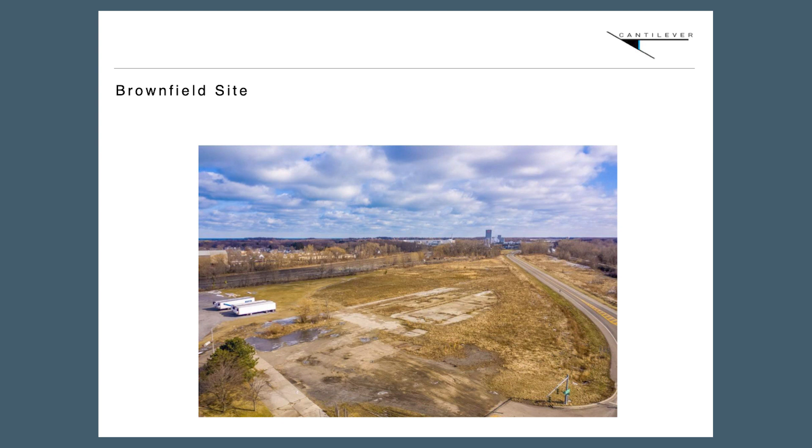So this is a brownfield site. Could be anywhere in the world. I want you to imagine it to be anywhere in the world. Could be Russia, could be - I actually think it's from Oklahoma, I don't know why. So we're going to build some buildings on this bit of land. Here we are, brownfield site, anywhere in the world. Could be Sydney, could be Newcastle, could be Russia, could be China, could be anywhere. We're going to build some buildings, right?

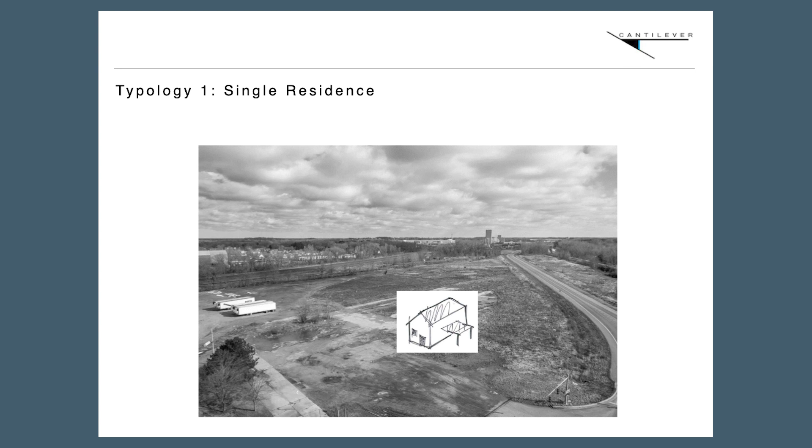So the first building we're going to build is - can I get there? Sorry, what do I need to do? Right, okay. And we're going to build what I call architectural typology number 1, which is a single residence house. So here we are, anywhere in the world, I'm going to build a single residence house. How are we going to build it? Anyone have any ideas? What's the structure going to be? Anyone have any ideas? More than 90% of the buildings in all of the world's single residence houses are built exactly this way. Come on, tell me.

Slab on ground with frames, timber framed, correct. You go anywhere in the world, including 90% of the housing stock in Australia, is built with timber stick framing, right? Developed about 200 years ago in the US when they started to standardize the sizing of timbers, 2x4s. I grew up with my dad when I was 3 years old building timber frame buildings. We still do it today, bizarrely, and it's been going on for 200 years, right? So I'm saying this is architectural typology number 1, which is a single residence house, has a structural solution which is common throughout all of the world, which is timber framing. And together, they're linked - I call them a pair. They're a structural and architectural pairing.

I'm going to have three of these. So that's architectural typology number 1, with a structural pairing of timber stick framing. I get a bundle of timber delivered to the site, and I'm going to stick by stick by stick put them together.

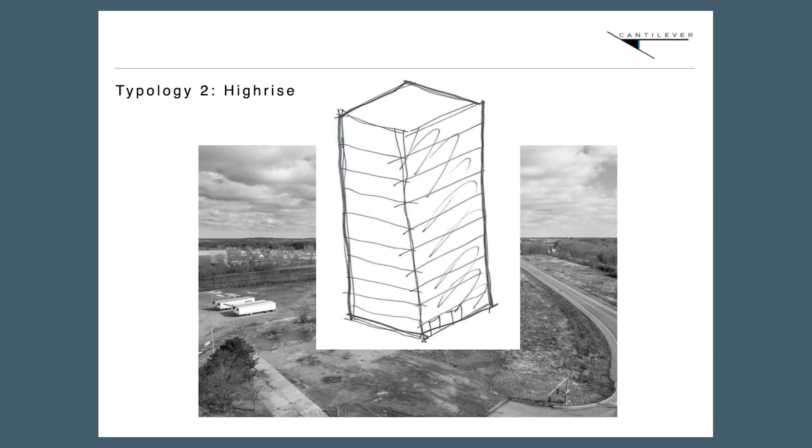Typology number 2, high-rise building. Think anywhere in the world - it's probably not 90%, but Australia's like this, America's a little bit different. What is the structural engineering solution for this building? Reinforced concrete. I don't know what the percentage is, probably not as high as 90. But reinforced concrete. So here we are, architectural typology number 2, high-rise building, structural engineering solution, which is a concrete frame building. No brainer.

Can anyone else give me another architectural typology that has a structural pairing where anywhere in the world, 95% of the buildings are going to be built that way? Super high-rise steel frame, ultra steel frame. So if we go back to the high-rise, there's some parts of the world, including the US, where high-rise buildings are done in steel frame. As a matter of fact, there's one in Sydney that was done in steel frame by Mirvac, but basically they're all concrete. Traditionally, these are concrete buildings.

So I had the luxury of working - not a luxury at all - of working on the Burj Khalifa when I was at Hyder, highest building in the world. It's a concrete frame. It has a different kind of concrete core, but it's basically a concrete frame building.

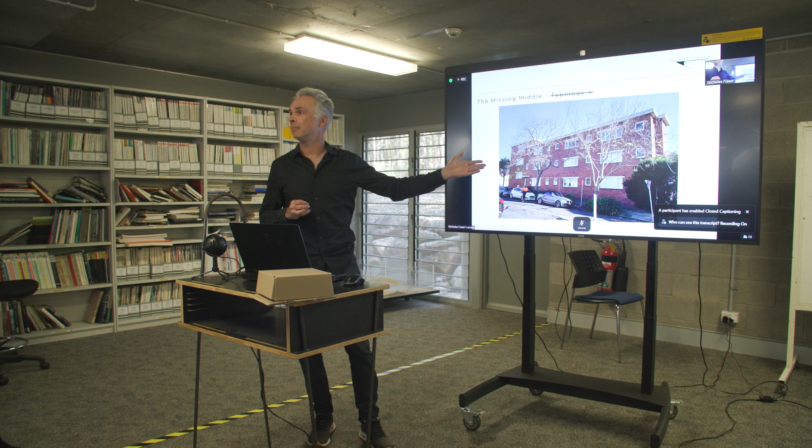They presented this to us, right? Budget $1.8 million, it was $2.8 million. It ain't going to get built. I said to Hamish, it would have been a good idea to get us in early, because we would have told you not to do this. That was done in the 90s and 2000s, but we don't do that anymore. Nobody builds like that unless you have oodles of money, and I don't even know if you'd have enough to build this. You're better off doing lots of different things, but that's not how we build today. It's just too expensive.

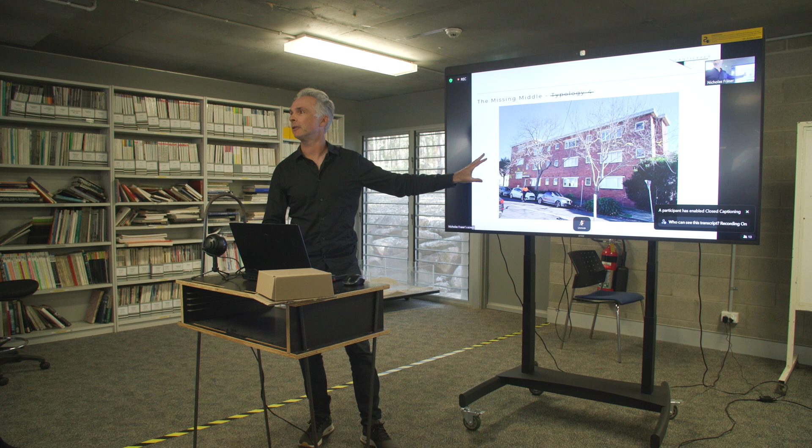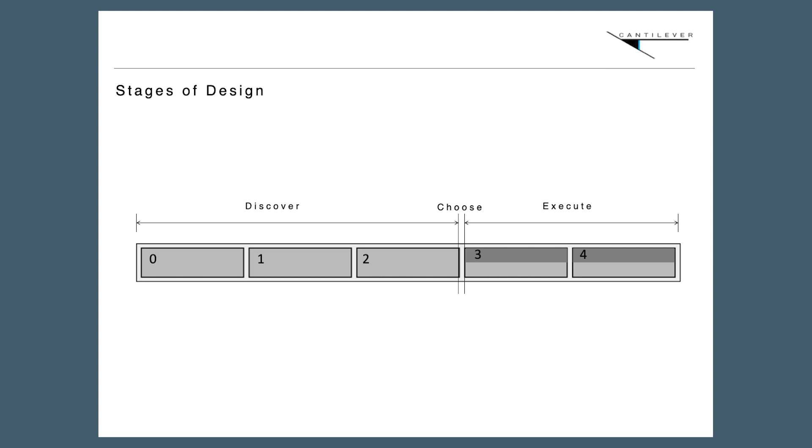So you probably know this, right? As an architect, this is probably what you do: you do a discovery stage, you choose what you're going to do, so this is the brief from the client. And then you discover what you're going to do from an architectural point of view. You choose, and then you execute. Execute means do the documentation. So there's a discovery stage where you have to discover what you want to do from an architectural point of view.

This is common to you, but it is not common to structural engineers. And I'm going to show you why.

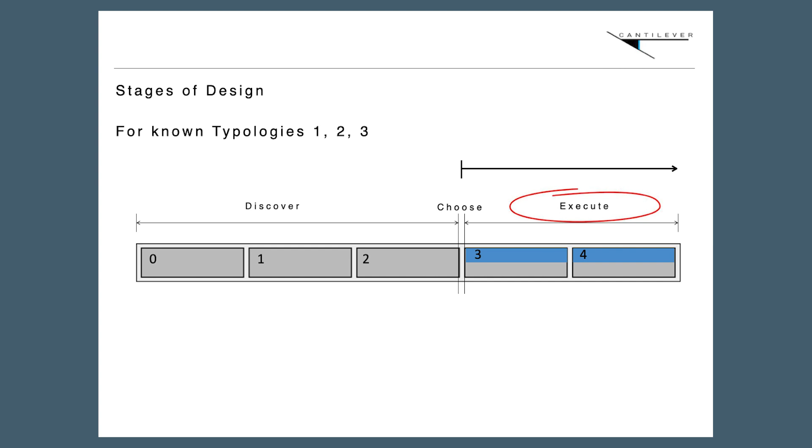For these known typologies, 1, 2, and 3, the structural engineer doesn't have to do any discovery. You, as the architect, can actually choose the structure. In a high-rise building, you can dictate what it's going to be - concrete columns, concrete slabs, a concrete core. So from a structural engineering point of view, for these typologies, there's no discovery. We just execute. In other words, you just give us where the columns are, and we'll document it and do the engineering.

But for structural engineers, outside of this typology, we need to do discovery. And that's the key to the ecosystem.

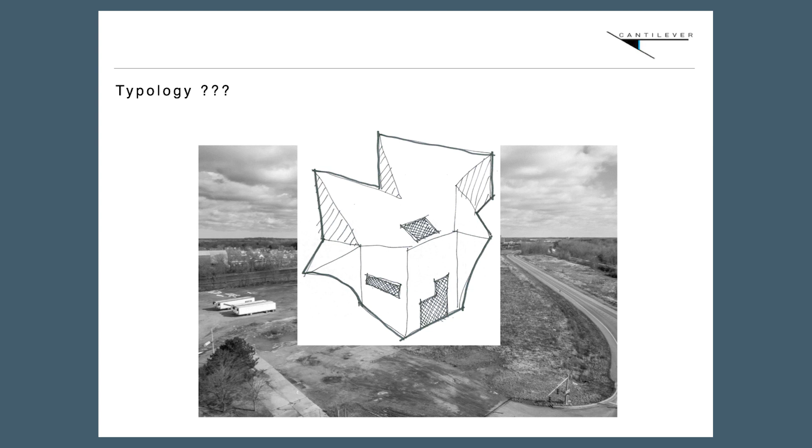So my question is, if we're given something that doesn't fit a typology - I'm not winning any awards here for graphics, this is me scribbling something together - if we're given something unusual that doesn't have a pairing, how do we build it? What is the structure? And that's where we need to do the discovery.

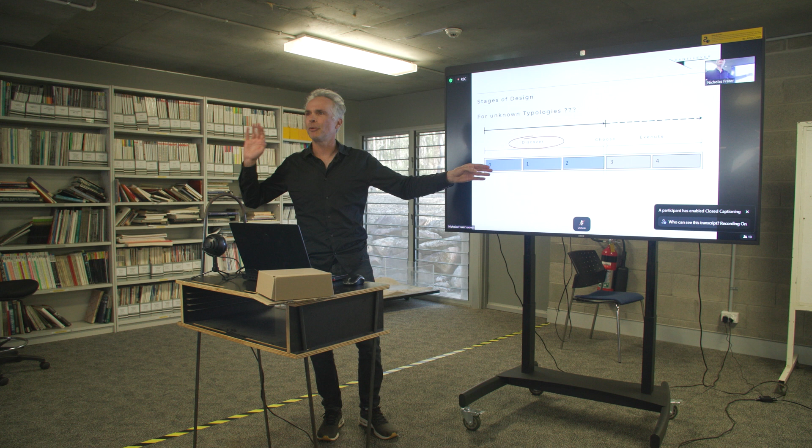As structural engineers, we are not trained to do this. As a matter of fact, lots of structural engineers would say, excuse me architect, just give me your construction drawings and we'll do the building. We just want to execute, we don't want to do this discovery. But at Cantilever, in my career, my work, we don't do jobs where you just need execution. We do jobs where you need discovery. And that's where we can add value, and that's where I say we need an ecosystem.

But remember, steel frame buildings, timber buildings - I'm saying all of these pairings, the single residence house paired with timber framing, the high-rise building with concrete, the warehouse that's steel framed - I think all of them will disappear. Even though we've been doing it for 100 years, I think all of those pairings will break down in the next 10 years because there's lots of things at work here. And those aren't often the best ways to build what is a building. So watch out for these pairings breaking down.

And in fact us as structural engineers - no, not us as a group - we need to get together in an ecosystem to do this discovery together. That's key. That is key.

We do a lot of timber, and you can't do execution if you do a timber frame building, because you have to do the discovery, otherwise you just do a concrete frame building. You can't take a concrete frame building and just change it into a timber building. Timber has its own unique properties that you need to account for. So you should start at the beginning with the idea: do I want to do a timber frame building, or does the architecture I have suit a timber frame building?

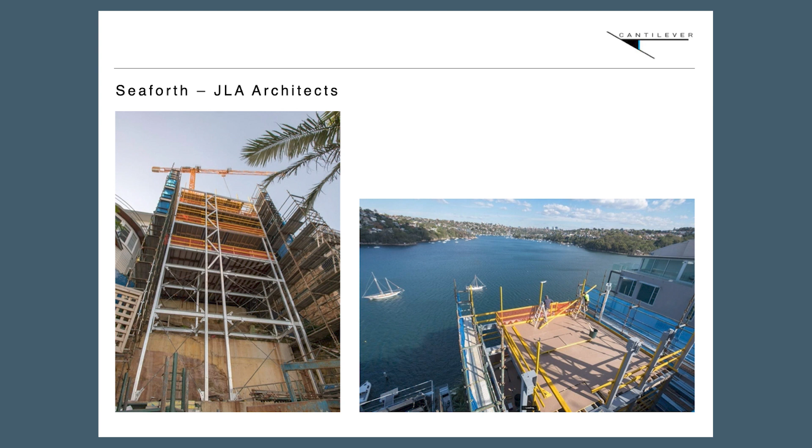This isn't winning any architectural awards, but it's a great story, and that is, it's a house in Seaforth. It's an 8-story building, and you drive in off Seaforth Crescent on the roof, and you go down 8 stories. So we're down at the water here, and you're driving in off the street at the roof.

Michael the client moved into the building about 6 months ago now, and I rang Michael and said, Michael, how are you? Are you happy with our decision to do steel framing? What would you do differently? And he said, Damian, if I built this building out of concrete, I'd probably be about 2 years from moving in, and I'd probably only be on level 3.

This building went up in 2 weeks and finished within another month, and then Michael moved in. And he said, by the way Damian, I want to tell you a secret. And I said, whoa, what's that? He goes, you were the 8th engineer that I rang.

And I said, the 8th? What are you talking about? He goes, no, I talked to 7 engineers before I talked to you. And I said, well, why'd you do that? And he goes, well, I just wanted to see what people thought. And he said, all the other 7 engineers recommended that this building be concrete.

You were the only one who, so when I first rang you, I said how are we going to build this building? Or do you want to get involved in this project? How would we build this building? And I said, oh, I don't know yet. And he goes, what do you mean you don't know? Why wouldn't we do this out of concrete? And I said, well, we might, that's definitely an option, but there's other options as well.

Through the course of about 2 weeks, eventually he gave me a bit of information that triggered this should not be concrete. And that is, he said, I'm going to be an owner-builder. And I said, well, you definitely don't want this as concrete, because as an owner-builder doing concrete, every single bit of formwork that you build is the set-out for the building. You want somebody to do all the hard work, which is the set-out, as prefab. So then we started exploring all the prefab options, and that's where we landed on steel.

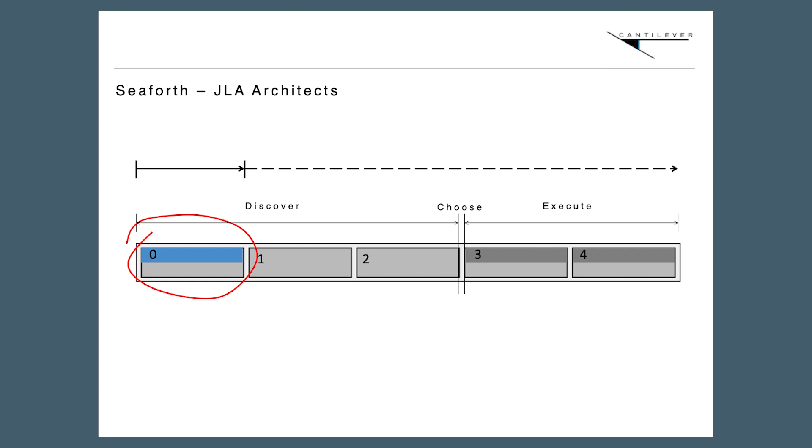So it was through that idea of discovery that we found out this building didn't want to be concrete. And what I think the other engineers were doing, I don't know what was in their heads, but I think they just wanted to execute. They didn't want to go through a discovery process. They wanted, like, this is an 8-story building, it's going to be concrete. That's the typology pairing that I know, and that's what I'm going to do.

And I don't want to have to think about this discovery. I don't know how to do it. I just want to execute, so we're just going to do concrete. And I think that's where we need to think about what the narrative is behind the client and the brief behind the client to determine what the structure wants to be.

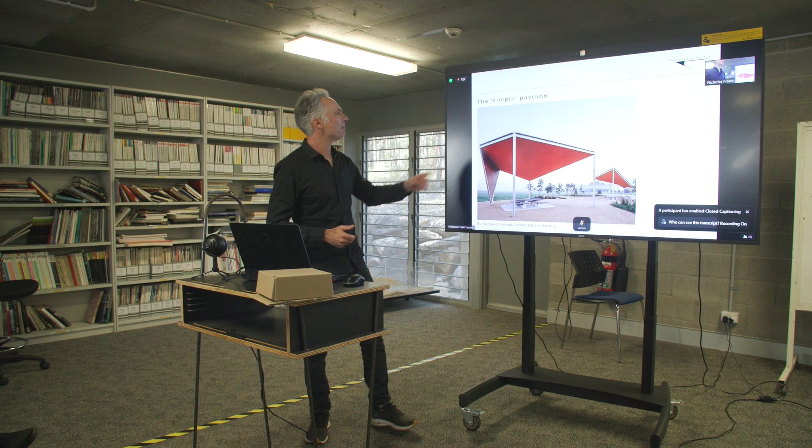I'm going to introduce the word simple here. I get calls from architects all the time saying, Damian, I have this really simple building. And that always rings alarm bells to me, because this was introduced to me as a simple building. Now, I hadn't formulated these typologies at the time, these pairings, when I got this drawing, but now I look back and say, well, the reason this isn't simple is because it doesn't have a pairing.

There's no obvious solution to this. Can it be timber? Can it be steel? Can it be concrete? Can it be glass, aluminium? Like, what is it? And I say the simplest buildings, including the Burj Khalifa, are ones that have a pairing. If you come to me and say, I have a kilometer-high building, I say, that's simple, because I have a pairing. So in my mind, it is a simple building.

Look at it. It's beautifully elegant. But do you know how long it took us to get here? The discovery process was at least a year on what it needed to be. It is amazingly complicated. Think about the water, think about the steel, think about the detailing. Look at the detailing. There's nothing simple about this. But yet when you look at it, you go, but it is simple. And I say it's only the ones that are pairings that we can truly call simple.

So this is the title of this presentation, and that is: how do we determine what the structure wants to be? I say that when you open up a magazine and look at a picture,

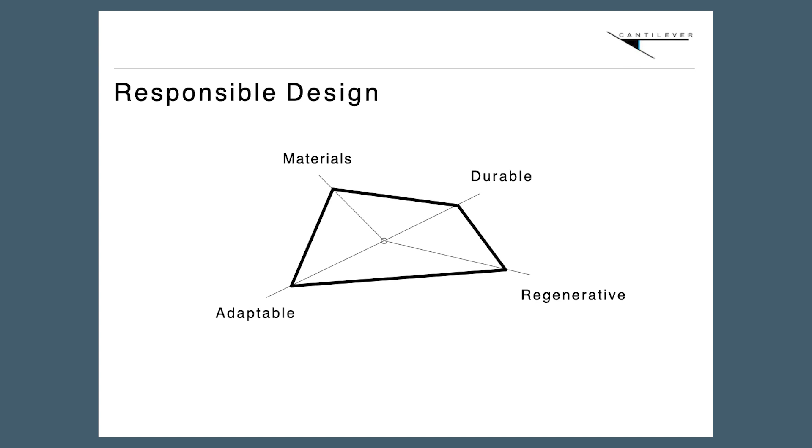I'm not saying this is right, but we've had a crack at it, and it's what we call responsible design. There's a number of different criteria, and I've done this as a little rhombus thing because each of these criteria kind of have different pulls and pushes depending on what the client's brief is and what the success of the project is.

So we say materials, that could be concrete, could be timber, could be glass, whatever. Materiality is, and I don't get into the argument of whether concrete is more sustainable than timber is more sustainable than steel. I don't know, there's lots of stuff going around.

You probably do it in sustainability courses here, like everything should be timber. Well, I don't necessarily agree with that. I think that you've got to use materials appropriately for its appropriate use.

And one of the appropriate uses is durability, is how we deal with durability. We have the ability to make buildings last 1,000 years if we wanted to. So what would we use if we wanted something to last 1,000 years?

Stone? Yeah, love it, stone. I don't think there's an Australian standard for building stone castles, I have to talk to Australian standards about that. But what's the equivalent of stone that we have? Concrete, no steel. Yeah, concrete with no steel, or concrete where the steel inside is protected enough to not deteriorate.

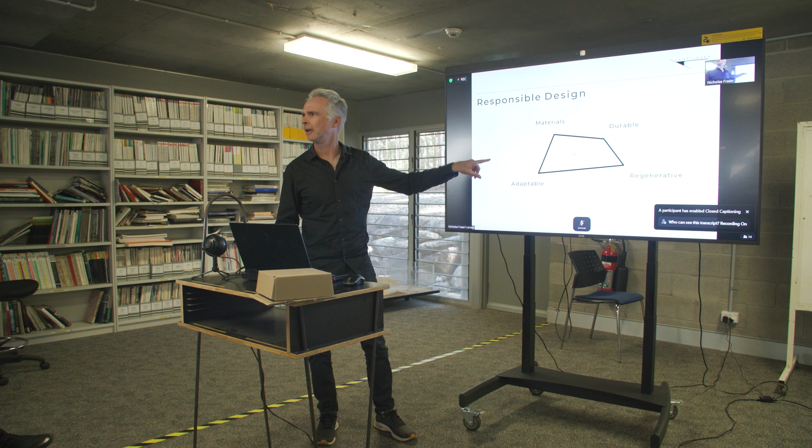Anything there? I mean, there's other ones. Anything that other people have any other ideas about what? So we call this responsible design, right? So it's like doing the right thing, using materials wisely, the dematerialization principles, about eliminating, substituting, optimizing.

I had this wonderful conversation with Elizabeth Farrelly about the Gunyama Aquatic Centre. She was highly critical of the concrete being used inside the building, saying couldn't we use timber or something more sustainable. And I kind of said, concrete in that environment is probably the best material to use, right? Because look at all the swimming pools that have steel inside - maintaining the steel is very difficult, and the corrosion that occurs in that environment, it's a highly corrosive environment. And timber, I don't know about the durability of the timber inside that environment either. So I argued that concrete was probably a good choice for the material in that environment because it's the most durable.

There are others. Ethics, like ethically, where do you get the materials from? Yeah, so where is it sourced? Where does it come from? What does it travel, does it come by boat? Is it local? I think you can say that about consultants as well, like where are the consultants coming from, right? What about the matrix for ethical materials in terms of their sustainability?

But like, for example, we use sarking to keep buildings dry and breathable, and they last longer, but they're often manufactured by slaves - people not earning living wages. Is that ever a matrix that comes into it? Well, not specifically, I would say, but I think that's probably part of the regenerative design criteria. Within regenerative, yeah. Like we do a lot of passive houses, and just maintaining an internal environment that is healthy as well is an interesting thing.

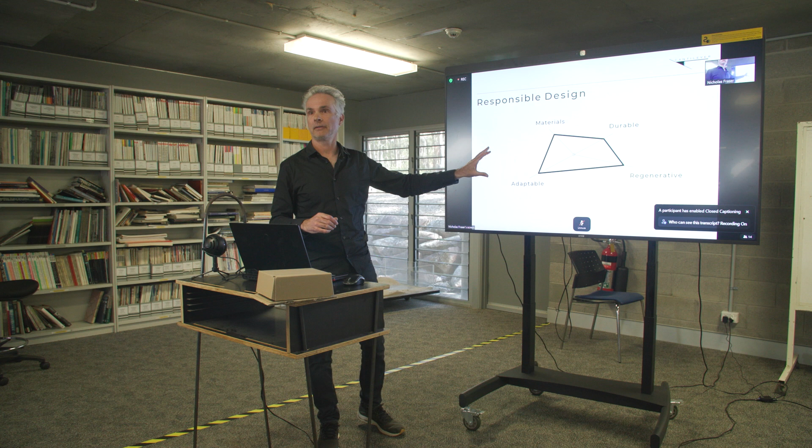And then you can adjust these matrices to fit what that term in terms of quality. I will talk a little bit about quality a bit later, including in terms of 1684, which is the timber framing code. We'll talk a little bit about that. But as I said at the beginning, I think quality, time, and money is an important matrix. It is important, but the challenge with those three is that they're very hard to determine.

And also the extraordinary buildings that run out of cost, but are extraordinary and create other revenues. If you put it in terms of cost, if it's not producing revenue afterwards, then you can interrogate whether it was worthy or not. But if it's producing what the Opera House did, or other buildings that ran out of cost because nobody knew how to cost it, or because it was a challenging structure, or COVID came, whatever the reason - so cost is always this tricky thing.

Absolutely. In the short term, I know when they did in Sydney, when they did the new convention centres, they had a 5-year plan. They didn't look beyond 5 years.

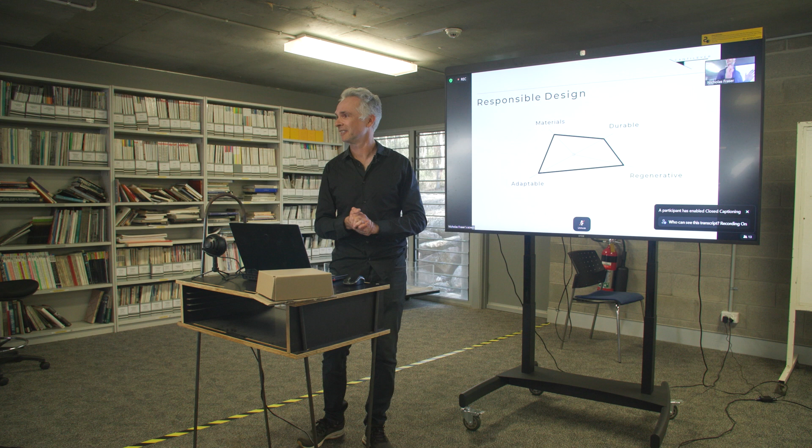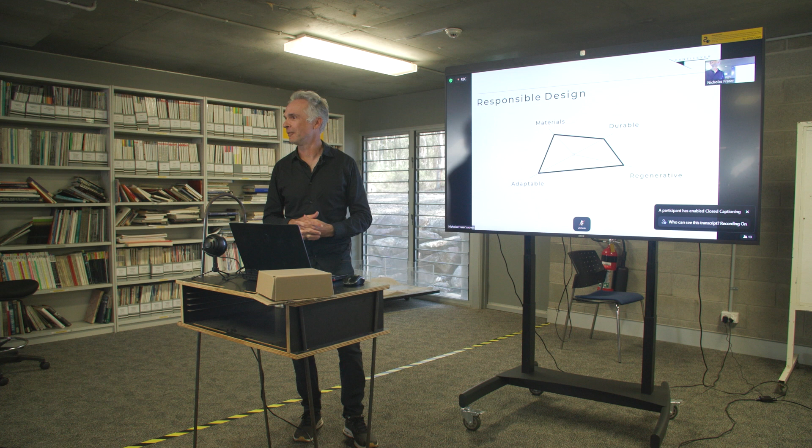Look at one of my favorite buildings, Sagrada Familia. How much revenue does that bring into Barcelona and Spain generally now? Could you have ever priced that building? Could you have ever foreseen what that meant to society? I even benefited from it - I'm not even Spanish, and I benefited from it. It actually changed my life when I went there in the 90s. Probably what I do today is a direct function of that building, because I sat in there and said, I could live here forever. It was magical - it moved me. And I think that's what you can't measure - you don't know what the benefit to society is.

It's like CLT - I love describing CLT buildings to clients because their immediate response is, well, I don't want to live in a sauna, Damian. It's biophilic, it's with nature, blah blah blah - it doesn't fly. You don't know what the benefit of it is until you're in one of those buildings. Dave and I had the great pleasure of being in the Redfern House, and photographs just don't capture what it feels like to be in that space. That biophilic, regenerative design is a very important part of us as humans to capture. So I think biophilic design could be on here, although maybe it's captured elsewhere as well.

So anyway, this is our attempt to rethink that matrix, the success matrix.

So what I want to do now is just run through some projects that we've worked on and show you the journey that we took to get to where we are.

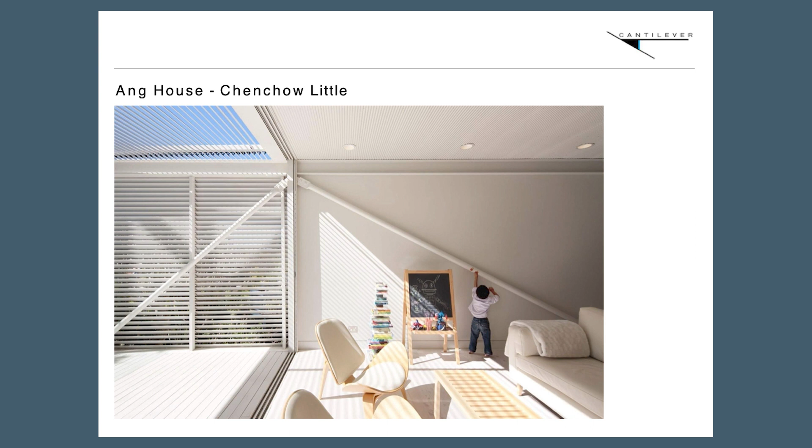This was a building with Chenchow Little, perhaps one of their first buildings I did in the early 2000s with them, before I was really captured by the architectural world. This is my first real experience with the architectural world.

Tony and Steph gave me their preliminary sketches, and I happily went away and did my preliminary sketches and came back to them and presented it to them. What you can't see is, but to the left there's a cantilevered balcony here, and I had these whopping big 400 deep PFCs, steel PFCs, cantilevering out. Tony and Steph looked at it and said, we can't have that - I want this really light, airy, slender bit of architecture, and you've given me this massive big beam.

So this was my first. I never imagined that anyone would ever question my design. I'd never had anyone question my design before. And Tony and Steph were suddenly rejecting what I had done, and I panicked, as I love to do. I'm a pretty panicky kind of guy, and I was like, well, I don't know.

He goes, come on Damian, we've got to think of something else. Can we put steel columns in the garden? No, we don't want columns. Can we hang something from the...? No. Can we make it a truss? No, we don't want a truss. Can we do struts up to...? And then Tony said, did you say a truss? And that's what we ended up doing.

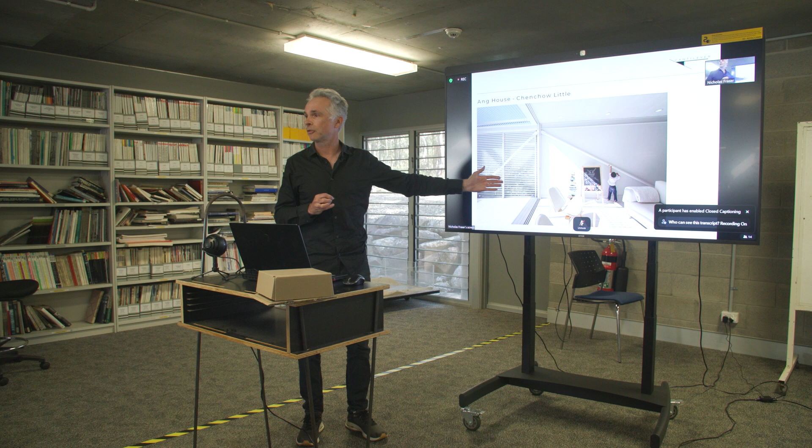It couldn't have lasted more than 30 seconds of me panicking to find a solution. And this is what I call emergent architecture, right? This is stuff that Tony and Steph never had the idea that we were going to do a truss. Once you get these ecosystems going, once you get these places where people trust each other, it is magical what emerges. It is absolutely not what you could ever have predicted. Never did they imagine there would be a truss, but that became the architecture.

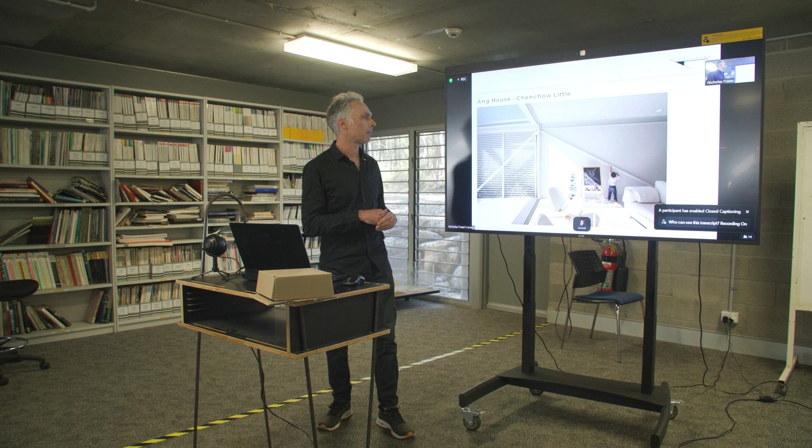Another interesting story about this, there's a connection here, and this was on a crazy tight budget. Tony came to me one day and said, what's the simplest way to make these connections? And I said, well, I've done a few industrial buildings, and what we do there for the temporary bracing is we just take the tube and squish it, and then drill holes in it, and put it in. Tony goes, that's it, done, we'll do that.

A couple of months later, Tony was at the steel fabricators, fabricating these trusses, these struts, and I get a call. Tony's panicking, I can feel him panicking. He goes, Damian, we have a problem. I go, what's that? He goes, when we squash one end, and we go to squash the other end, there's no way we can get them to align, right? So we're going to have these things that don't align, and we need them to align, otherwise you'll get this crazy connection here. And I said, oh my goodness, I don't know.

In my panicky way again, I was like, well, can they hold it in a jig? No. Can they grip it somehow so they can squash it? What is the machinery? He described the machinery to me, and I said, oh goodness, I have no idea what we can do here. And then I said, I got it. Squash both ends, cut the tube in half, spin it so they align, and weld it back together again.

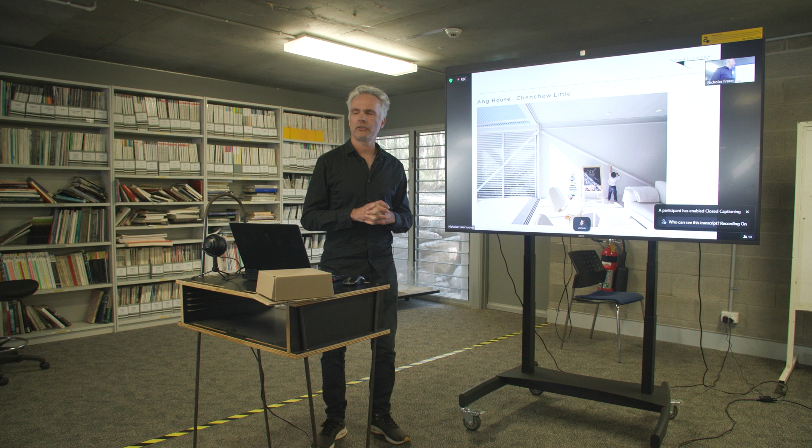So it was just, I love panicking. You get the best out of me when you get me into this panic mode. It just gets me thinking. There's a lovely Teresa Amabile, I'm a big fan of her, she talks about creativity, and time constraints are a way to get creative, to produce a creative or innovative solution. So I love having time constraints, I love being under pressure. I thought it was a cute little story about these squashed ends.

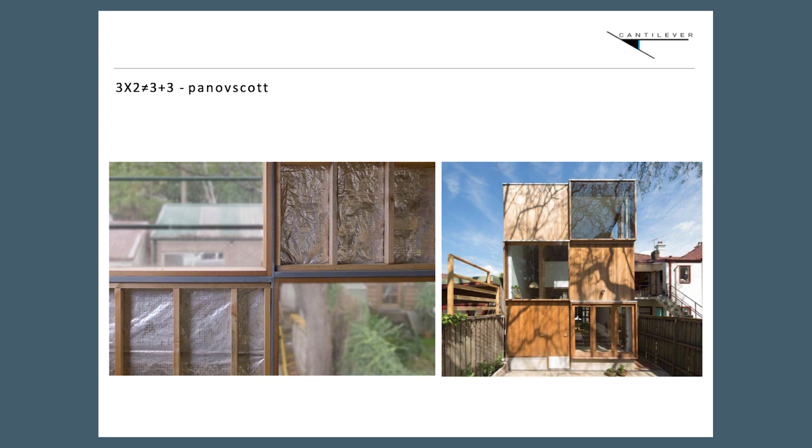3x2 house, anyone know this house, with panovscott? Anyone know Andrew and Anita? This is actually used quite a bit for the facade, for facade engineers, it's kind of a case study that's being used. The brief to me from Andrew and Anita, this conversation was more than 30 seconds.

The brief to me from Andrew and Anita was that they wanted these two bits of glass to touch. And I said, well, you need structure in there, so they're never going to be able to touch. Yep, we get that, but we want them to be as close as we can, as close together as we can. Originally I had a steel column through the middle, a portal frame.

Then through a workshop, which was probably more like an hour, we eventually came up with the idea that we'll do steel as a portal frame, but we'll hang this central portion with a steel plate, and then offset the transoms. That will get us these two bits of glass as close together as we can. So that was the workshop, or the journey we took to get to this point, because the original design with the column in the middle had... 500.

The bits of glass were about 500 mils apart.

So it's about allowing yourself to explore these different options and understand what the brief is, and understand what is possible, right?

I don't mind the idea that people come to me with things that aren't possible. That is Living Building Challenge. Living Building Challenge is almost unachievable, right? But what it does is it drives you to do something that's good. So as Caroline Pidcock always says to me, don't let good be the enemy of great.

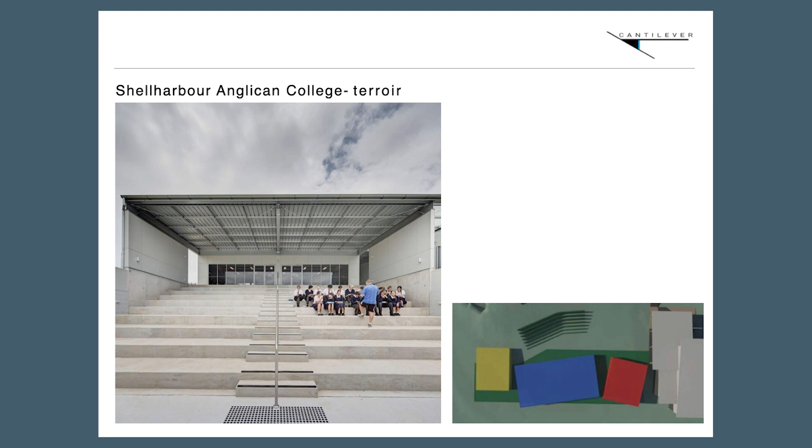That we have the ability to produce buildings that hit a budget, hit time, and are of the quality that we want, right? We have the ability to do it. We know how to do it. It's well documented how to do it. But strangely enough, we actively choose not to. We actively choose not to.

Do you know, if something goes wrong on site, if you get a variation on site that was unexpected, the common thing to do is to blame your structural engineer, or to blame someone, right? I need to blame someone. And I say, that's not the right way.

There's usually no one individual person to blame. There usually is no one. What you should blame is the process. That is truly what I believe. You should blame the process.

Because this building is a classic example of how you can make the process work for you. This was originally the little blurry vision that was given to us by Chris Rogers at Terroir. What Chris said to me was, this is what we need, these 3 rooms, and we just want the most efficient building that we can build, right?

Whatever it takes to build the most efficient building, that is what we want. So that's where we started. That's why Chris brought us in to discover, in what I call stage 0, the discovery stage, how to build the most efficient building that we could.

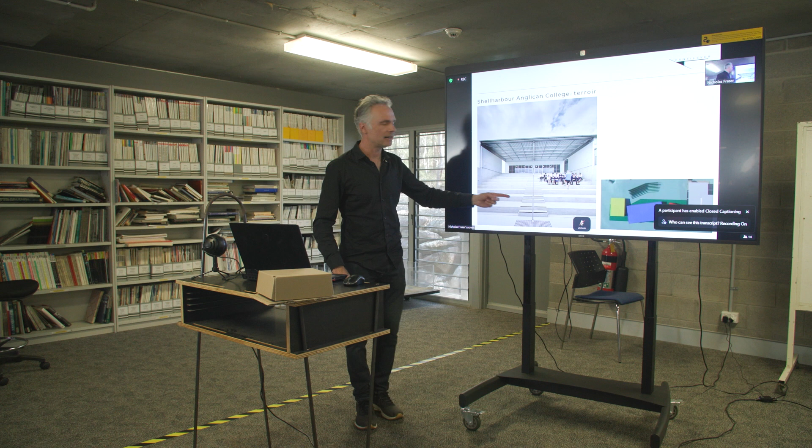So this is used by the Sydney Anglican Schools as an exemplar for how to do things properly, and included bringing the structural engineer in early to negotiate how to do this. There's 10 things, you can read it on our website, that we did to make it an amazingly efficient building.

Which includes using cantilevers, of course, right? Every building has to have a cantilever. But also using the same steel beam, 14 of them over the whole building, to take advantage of the steel. Notice that the purlins go over top of the steel beams, again for efficiency.

Notice that there's no ceiling, right? I'm going to write a paper one day on all the buildings that we've done with no ceilings. Why would I do no ceilings? Why would that be a key criteria for making this an efficient building? So you can see the structure? Of course, so you can see the structure.

No, well, you don't have to put plasterboard or villa board or whatever on there. But what else? Why would putting no ceiling in there change the structure? Lighter? Sometimes lighter is bad because it's actually uplift which governs this. So in fact, weight is good. Any ideas? It's very structural.

You don't need extra elements to fix the ceiling to? Don't need extra elements? Sure, that's not where I'm going, but yeah, absolutely.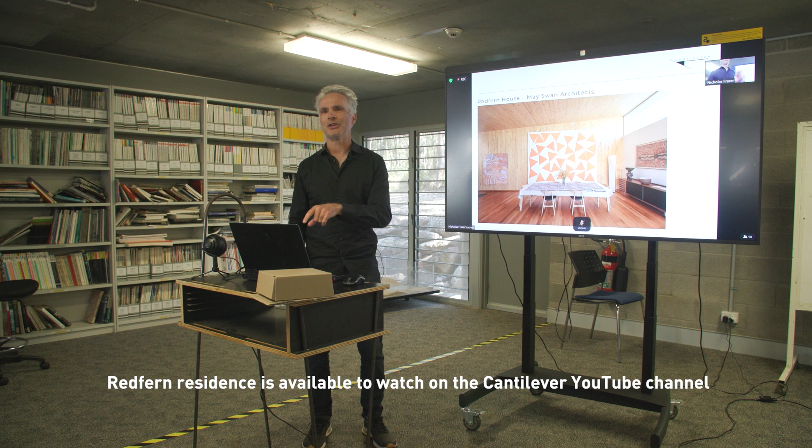It's on YouTube. Check it out on YouTube. Thanks, David. That's why you're here, David. Thank you.

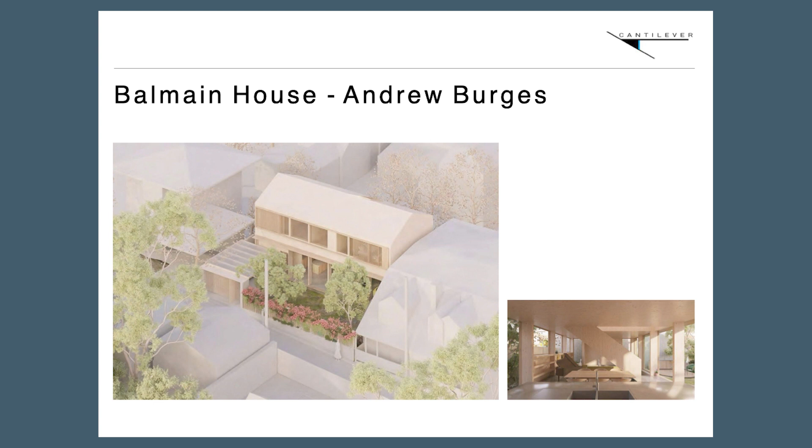Another project—this is Balmain House with Andrew Burges. This was the rendering we got from Andrew at the very beginning. Andrew goes, I want to explore different things. And I said, well, it doesn't look to me like you want to explore—it looks like you've got a CLT building. He goes, yeah, I just wanted to see what it looked like as CLT, but let's explore different options. And I said, okay.

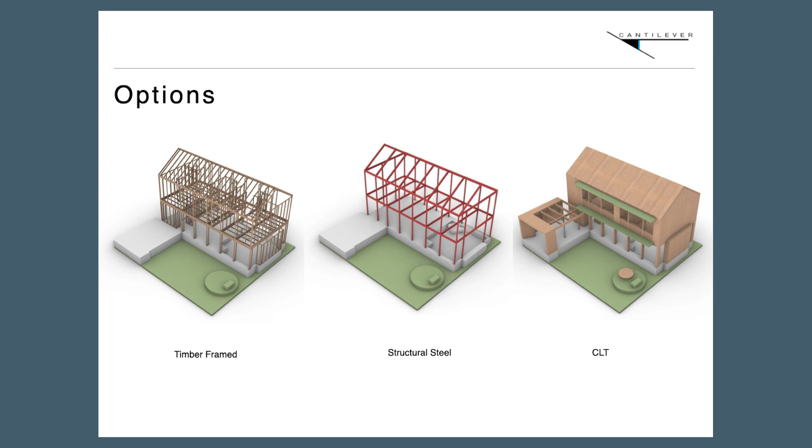So we came up with these three options: timber stick framing, structural steel, and CLT. There's lots of other options, but these are the main ones we looked at.

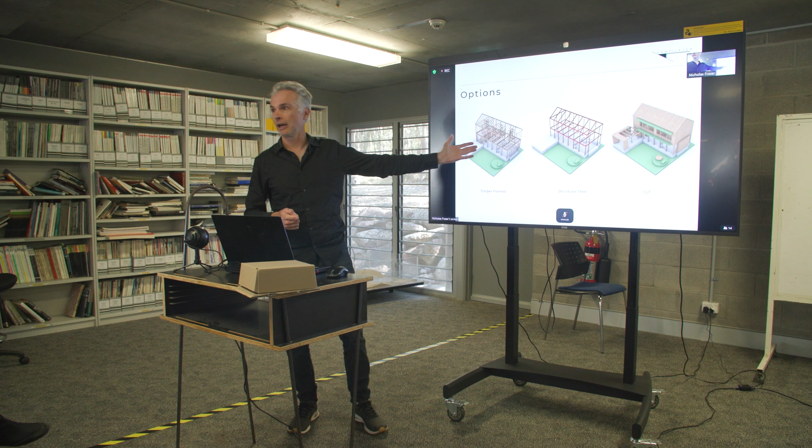As I said, 95% of buildings in Australia—in the world probably—are built with timber stick framing. You go out to tender on this and every builder in Australia would tender on it. And probably the one you'd choose in this competitive mode is the builder who's made a mistake during pricing and underpriced it, only to get hit by variations the entire process because they've got to make their money back. Or they needed the job at the time but then realized, just a second, I can't build it for that. So this is good for a highly competitive market.

Steel, structural steel—so what are the advantages of structural steel? Remember, this could be prefab or stick framing. Could be prefab, but let's just stick to traditional timber stick framing—bundle of timber on site, 2x4s, and you put it all together. What are the advantages to steel work? Speed, strength, and spans.

Yep, think about the responsible design criteria. What was the other responsible design criteria that we had? One of them, if you remember. Durability? Yep. Regenerative? Absolutely. I was more thinking adaptability, right?

Look at the internal walls here—can't change that. Look at this—we do dozens of these a year. And you think, why? We have builders who say, just give me that, my steel fabricator does the set out. It's done in a day—you can put that up in a day. And then I come in and timber frame it, and I'll get the client in six months, as opposed to this.

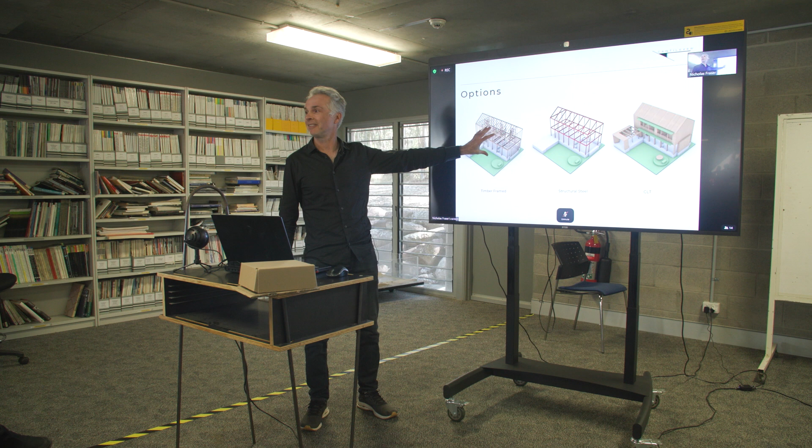Beautiful story I have about this: I walked onto site one day, and the drawings I had produced were timber stick framing. I said to David, the builder, we can do this as timber stick framing, which is what my documents show, or we can do this as CLT—this isn't this project, by the way, a different project. With CLT, I reckon we can do this building in two days. Timber stick framing, what do you think it'll be? He goes, well, we've already priced it, and we think the timber stick framing will take six weeks. So I said, okay, six weeks, two days—not that much of a difference, right?

So I went to site just shy of six months later, and they were still hammering bits of timber together. I said to David, trying my best Kevin McCloud—because Kevin McCloud has this amazing ability to get people to open up to you—I said, David, remember when we talked about the fact that you thought this timber stick framing would take six weeks, and we're now at six months? How do you feel about that? And he goes, oh, I feel pretty good, because we actually thought it would blow out, and we'd put that into our price.

I said to David, in the best way that I could, that just defines everything that's wrong with this industry. The fact that it didn't even rain during that time, but yet it took you 10 times what you thought it would originally take to do this build. Why? Not 10 times, but why?

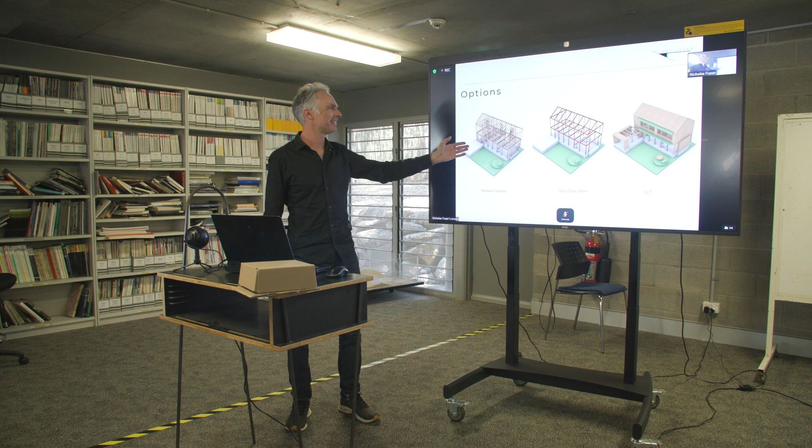And including the client, I shouldn't exclude the client there as well. So, anyone know how we're going to build this? Well, in fact, we got rejected by council, so it's not going to be this at all. We're doing a different building, which is timber stick framing. Whether that's right or wrong, I'm not here to say, but the ecosystem, including the builder, said I just want to do a timber stick frame, let's just do that. And they're not even doing prefab, they're just doing timber stick framing.

Remember as well that when you're on site for 2 days, as opposed to 6 months, black swan events happen. It's going to rain for 6 weeks, definitely. Just before you put the roof on, it's going to rain. If you take the roof off, it's going to rain. Whereas for 2 days, the risks are so small. So that's why CLT is an advantage, and it's hard to price all of that into these buildings.

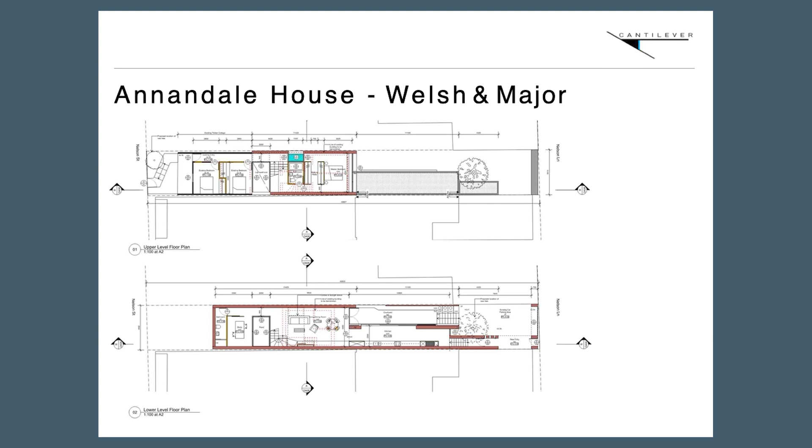Another house, and I've got a prop here. This is the Annandale house with Welsh and Major. Anyone know this house? Anyone paying attention to the architectural world in 2017, because it won an award? So these are the original drawings that I got from David. David was here last week, David Welsh. Did he talk about this house? No, I don't think so.

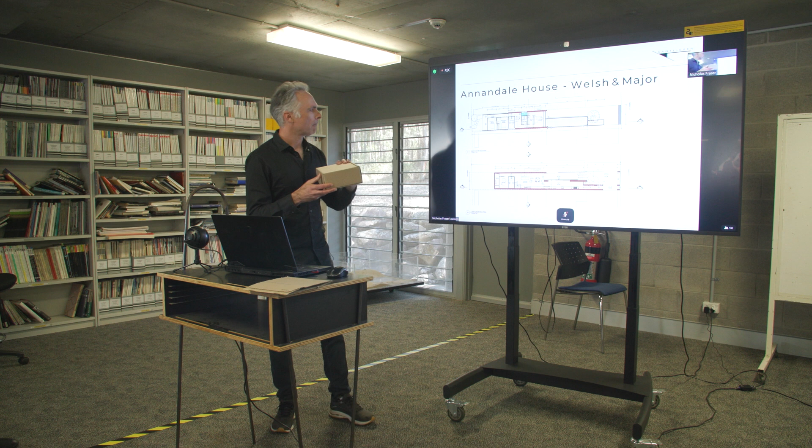He might have, because you might recognize it in a minute. So I love boxes, by the way. This is a box for holding stuff, but it's also a box. So this is the original building that they gave to us. And you'll probably look at that and say, yeah, that's fine, no worries, everything's cool.

But what you might notice is that there's not many return walls in this. So when you think of the most efficient building that you could possibly build, it's this. It's a box without any windows and doors. Probably not going to win any architectural awards, but that's the most efficient thing. Any movement or deviation away from this is a compromise. It's going to cost you money, it's going to cost you time and effort. So that's what you want to build.

Now, putting windows and doors, probably not too big a deal, right? Of course windows are more expensive than just a solid wall, but structurally, if we just think about the structure, putting windows and doors probably isn't too big a deal. Changing the external envelope, shaping it a bit, we're stepping away from that.

But there are things you can do to this box which are devastating. Anyone know what I could do to this box that's devastating? Remove the whole side. That is the most devastating thing you can do to a box, because it's handy for storage, but it ain't handy to hold a building up.

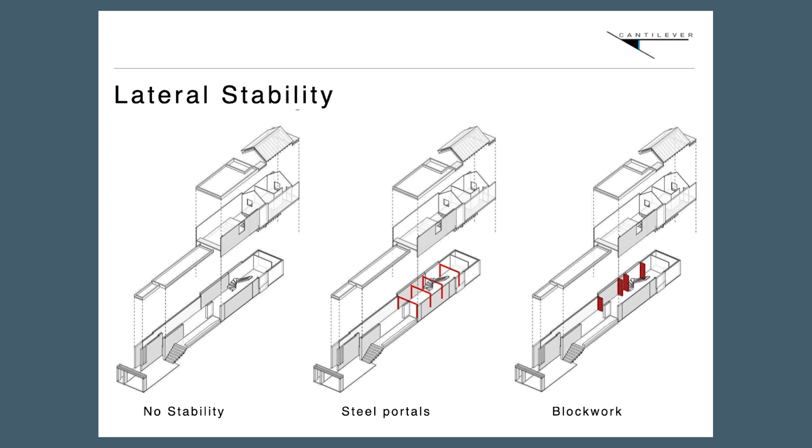So we needed to find a solution. The solution we proposed was steel framed, and David wanted to expose brickwork, and the steel frames were disrupting that. David goes, are there any other options? And I said, well, we don't have any return walls, so we could put return walls in. So I presented this, and I did it reluctantly because I thought, geez, no one's going to accept these return walls in this space. Clearly they want this tunnel. But guess what David did?

Totally embraced it, right? Anyway, ended up winning the biggest architectural award in New South Wales in 2017.

Could that stair, as your suggestion, have worked as a cross brace? It does provide stability, yeah, absolutely, it does provide stability. But strangely, we don't rely on it. What would you need to make it strong enough? So do you need to diagonalize through the other side? Yeah, it actually doesn't come through to this wall.

And we don't know, the stairs are often done as a last thing. Originally it was a steel stair, actually originally it was timber, and then it was steel. This is actually outdoor space, by the way, the roof has an operable roof. This is actually outdoor. So it was originally timber, then it changed to steel. Only at the last minute did it change to concrete. So we never relied on it.

But what a great suggestion. Why don't we use that as our lateral stability, right? So it's basically a version of this, but instead of diagonal rods, looking around thinking, can we see anything here? But this is a concrete building, which is slightly different. You could have one strut, which is effectively that. But as I said, bizarrely, we never considered stairs to be part of the solution.

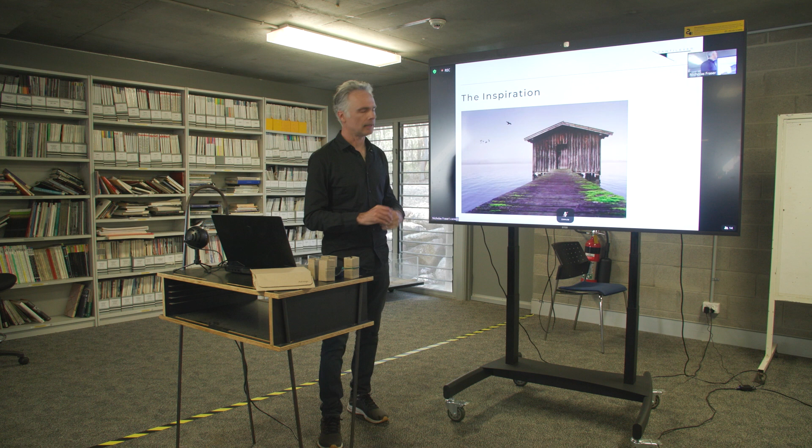The kind of architectural narrative for this project was a boat shed, innocent timber boat shed, timber framed, no steel work. So that's what we're kind of driven by, the narrative. So, and this was a rendering that was done later, but it gives you a good idea about what the structure is.

And so this is the final building. It has a concrete podium on concrete columns, and above that is a lightweight frame, with these extraordinary operable doors. And thinking about the extraordinary operable doors, effectively, we've got this, right? It's completely open structurally at these ends.

So we've got a process to go through to determine what, because this can't be a timber boat shed. Well, I shouldn't say that, it could be a timber boat shed. So I'll just start with this. So the reason we were brought into this project, this was a project with Frasers.

The reason we were brought into this project is because there's a boardwalk that runs underneath the building here. And if you go down there, you can actually run or walk right the way around the lagoon. It's pretty amazing. And we had to keep the structure 500 mils or less in this space, otherwise we wouldn't get the headroom in the space.

And the original engineers that were involved in this project couldn't find a solution where the beams were less than 600 mils. So we were just asked to come in as a peer review and say, can we get these beams down to 500 mils so that we can walk underneath them? And so when you look at that...

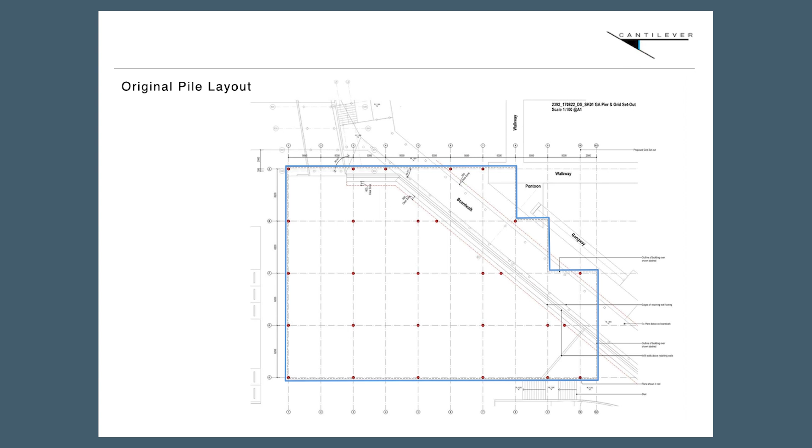Anything magical? Reduce the weight of the building above. Reduce the weight of the building above? Yep, reduce the load. Anything else? Columns, so these are the concrete piers that support this slab. So this is the concrete pier layout that support the suspended slab.

Using the roof to sort of hold everything together? Yeah, bizarrely, we actually looked at that, using the roof to hold the thing together, right? So it's these spans here, which are the critical ones, which are the ones where these beams needed to be 600 millimeters deep. I don't expect you to get the answer, I just wanted you to think. You beef up the other ones where you don't need to walk under it, to then reduce the ones where you can walk under it. Absolutely, and in fact, that is exactly what we did, as well as other stuff.

Anything else? Anyone remember the name of my company? Because Cantilever screams efficiency, right? So what do you think I suggested that we do?

See how these columns are on grid line 1? There's no reason for that. These are below ground, it's all free. We actually shuffled all these columns in to introduce a cantilever. What we've got to think about here is forget the geometry, forget the restraints, forget everything. What is the simplest structural solution? What's the most economical structural solution?

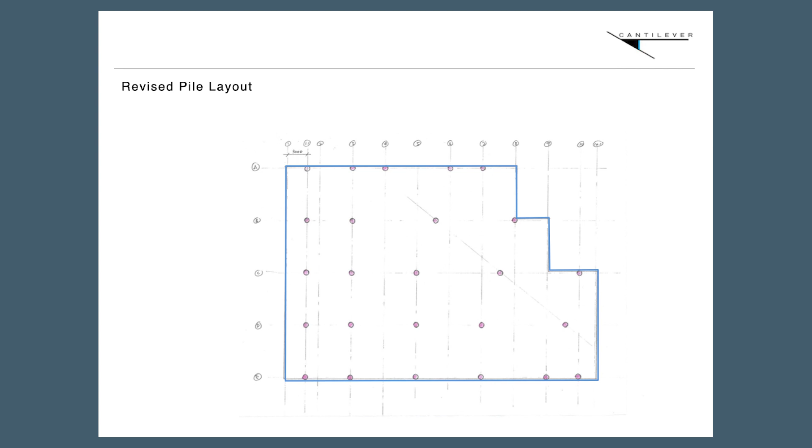So again, cantilever, first internal span small, big internal span, and then we were limited by the boardwalk here and the cantilever. That allowed us to get the beams to 500 mils, by removing 5 columns and making the spans bigger. I mean, how bizarre. But it's hard to see. Anyway, that's what we did.

Do you mind technically telling us why that works? Like the first span smaller, the second one bigger - why functionally is that the way?

Yep, that requires a very engineering answer, but it's all to do with the way a beam wants to work. The best way to describe that is you want continuity. That's why concrete is such a great solution, because you want continuous spans. The way statics work is that if you imagine with these two columns, there's no deflection in that span. So this one deflects, has a large deflection, and then there's basically no deflection in that span, and then this one has the large deflection.

If you think about the deflection of the slabs, think about how this thing is deflecting - it's deflecting, then it's deflecting, and then it's not deflecting, and then it's deflecting again. In actual fact, by removing this column, we get this one deflecting more, and it actually makes that one go up. That's why this is the enemy, because we're making it rigid where it wants to be flexible, so that as I stand here, this one comes up. And it's that idea of continuity which is the key.

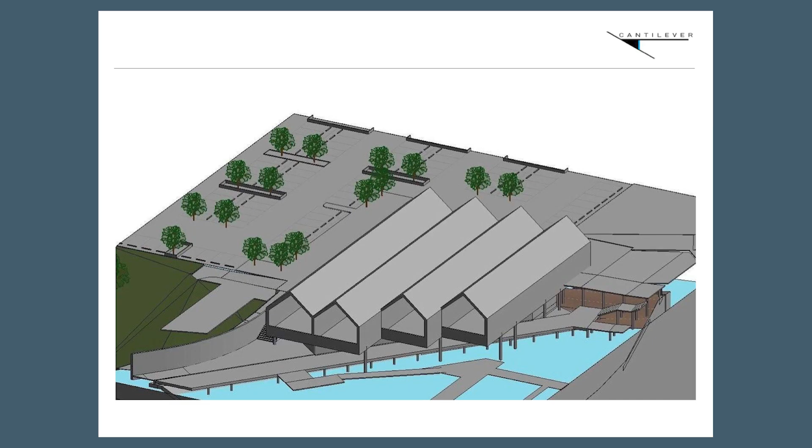Maybe that's a philosophical thing. But this followed a traditional design process where we were given the architectural shape. We do structural massing, so we render this in Rhino. We render it in timber intentionally because we have a timber first policy - despite the fact that often you don't go to timber first, we render everything in timber just to trigger that. We wanted this to be a timber frame building - it wanted to be, so that's how we modeled it.

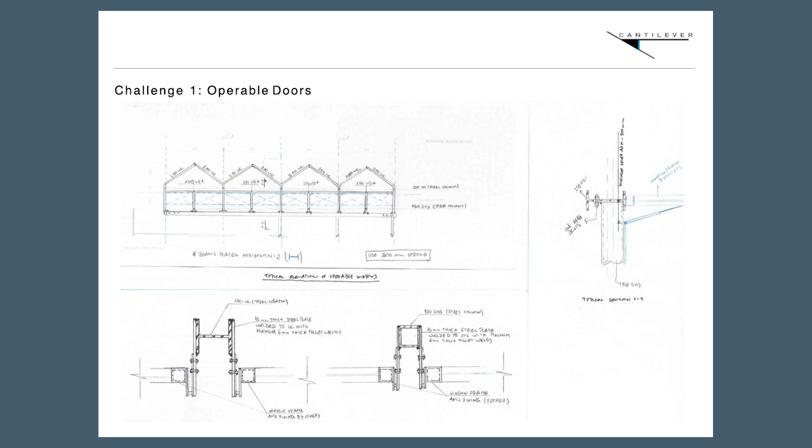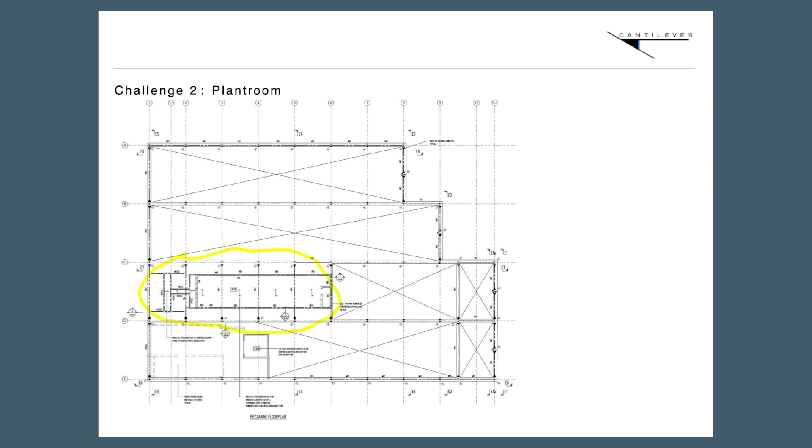But there were some major challenges. One is the operable doors, which have massive loads, and getting timber to take those loads was extraordinary. So we knew that for the operable doors, we needed to support them by steel. There's another area here which is external - the plant room, again timber externally is pretty tough, so we thought that needed to be steel. And the third one, the big one - I could talk about this forever - is lateral stability.

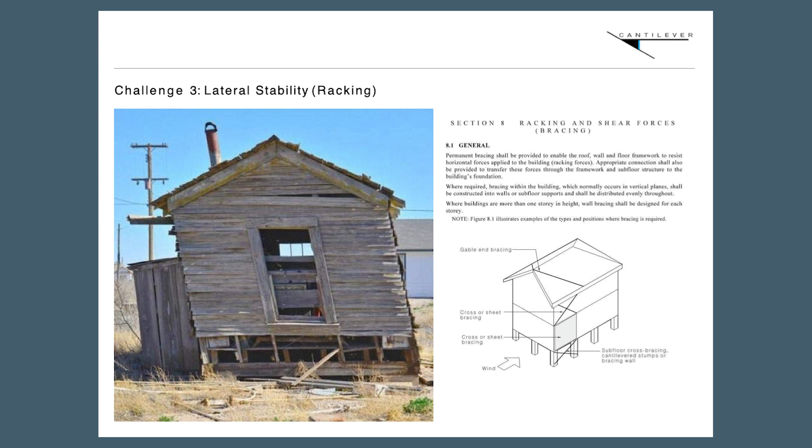This is an excerpt from AS1684. Anyone know AS1684? I have a love-hate relationship with it. It's a cookbook for single residence houses, up to 3 stories - an amazing code, packed full of delightful stuff. Anyone could pick it up and go build a 3-story building, it's just a cookbook that tells you how to do it, so most builders would know how to do it.

20% of this code is dedicated to what they call racking loads - don't know why - shear forces, bracing. We call it lateral stability, and this is what we're trying to stop. There are 2 different types: core diaphragm, and distributed frame.

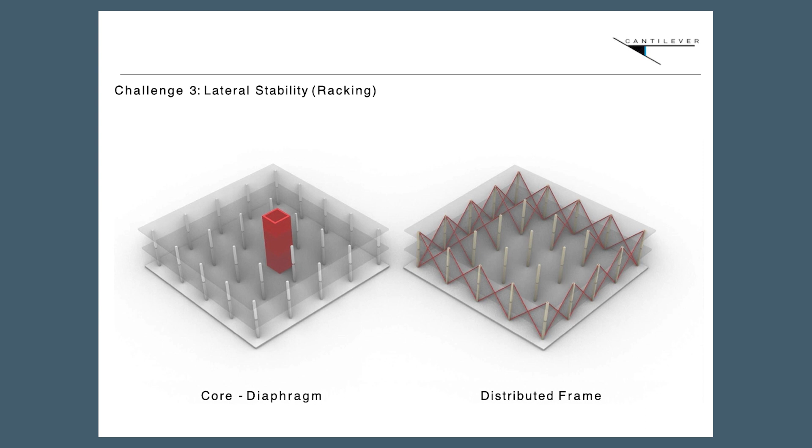There's the Burj Khalifa - it's a core, a concrete core. There's the Empire State Building - anyone know how the Empire State Building works? Steel frame, steel frame with no bracing, all portal frames. Apparently they did it before they had computers and everything, and there's an amazing amount of lateral resistance in this building, so you could build quite a few more stories onto it and it would still provide lateral restraint. Whereas now we've kind of refined it to an art.

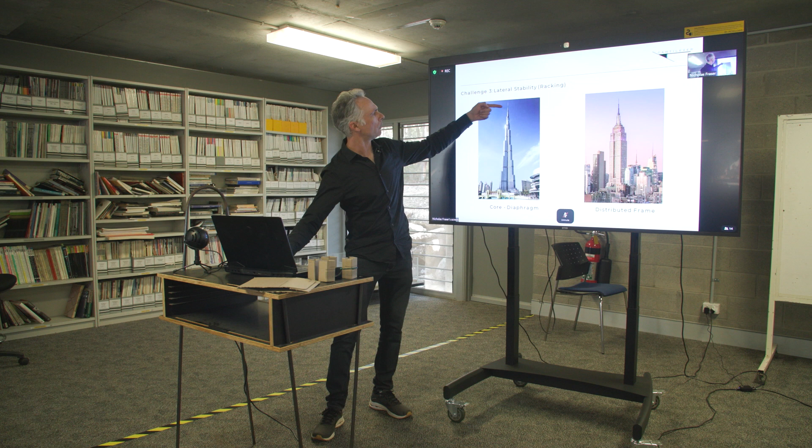So putting more floors onto an existing building is not so much about the weight, but about the lateral stability, because it works harder down the bottom, as you can imagine. If I push at the top like this, it's working harder down the bottom because it's got to accumulate all those wind loads.

So slowly we moved away from the timber, even though we had a timber architectural narrative, the structural narrative struggled to do timber. So we ended up with a full steel frame, and that's what we built. So there it is.

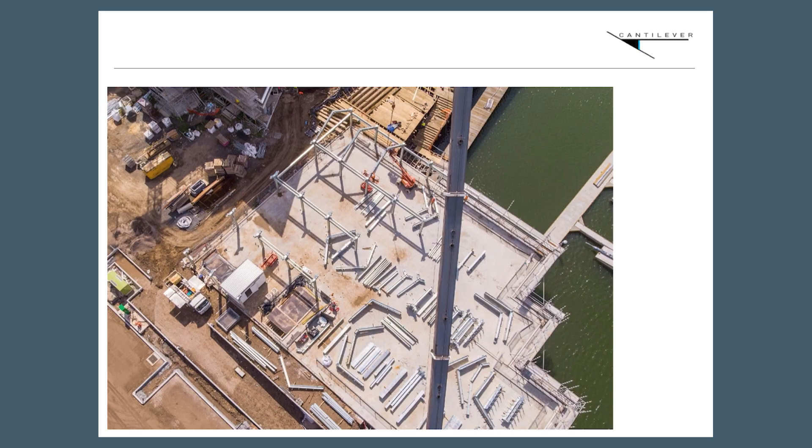There it is down the bottom. Again, I wanted to look at the operable arms, the operable doors, and the arm, see how that's so close together. We wanted them to be further apart, because the closer they are together, the bigger the strut load. So you want it spaced apart. But what we did was have the struts, in their full open position, horizontal, while the door is actually sloped. We worked with Stephen Jones at Renlita to determine all those loads.

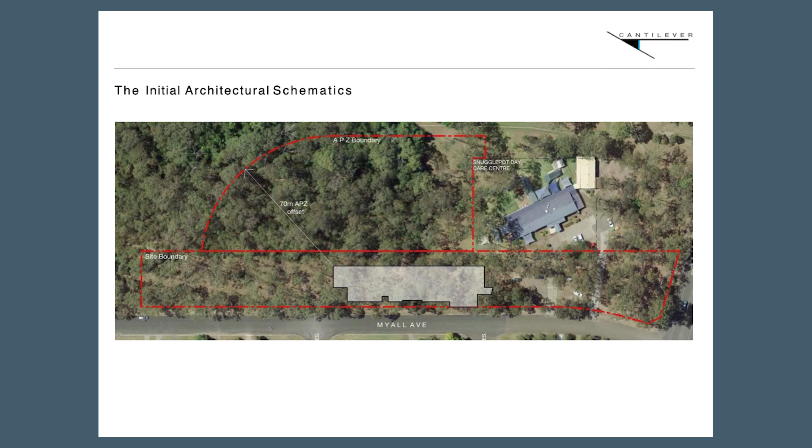It's guided by the Living Building Challenge principles, though it's not certified. Here's the site, and this was an integrated design, so we had the builder, structural engineer, client, and architect all together at the beginning of the project. We started with, well, what are we going to build here? Going back to the idea that we have a budget - what can we build, rather than here's the building, how much does it cost? That was the driving factor behind this.

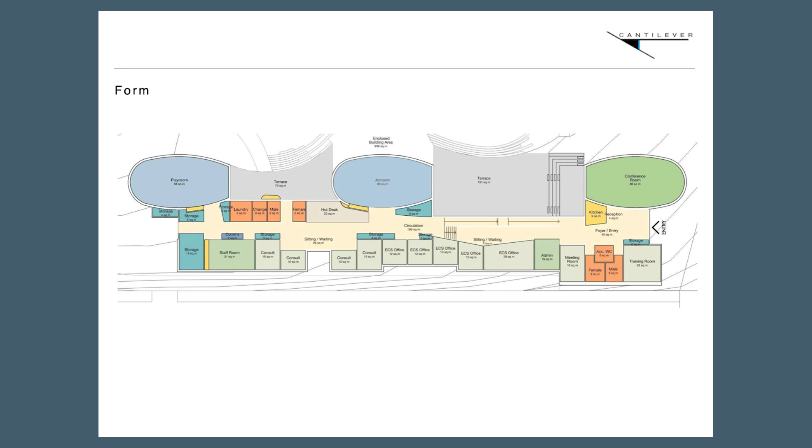So here's the basic layout. Stage 1 went up to there, and then we've just finished stage 2, which is there.

Has anyone been here? Have you? Wow. We built the yarning circle there. Oh right, with Caroline. Yeah, awesome. So you know the punchline to this story, but don't say anything.

So here we are, water. There's a water narrative, which was amazing, done by CJ Arms.

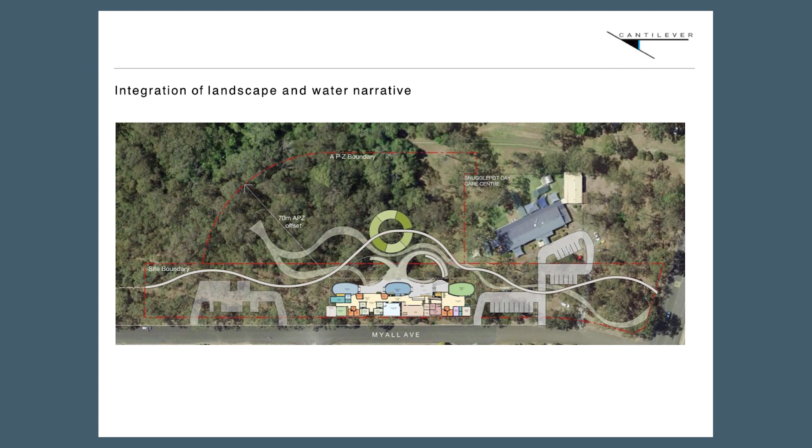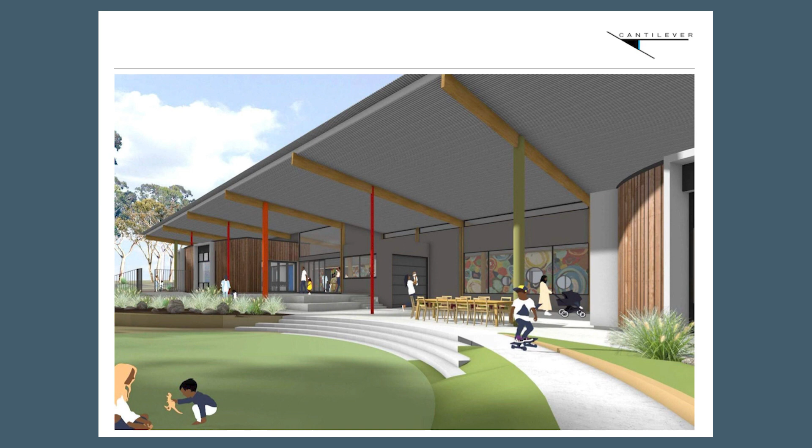Here's the site, and here's the rendering that we had during the design stage. Curved glulam beams, which actually, due to cost, we got rid of the curve, so it's just straight glulam beams now. Here's the concrete slab.

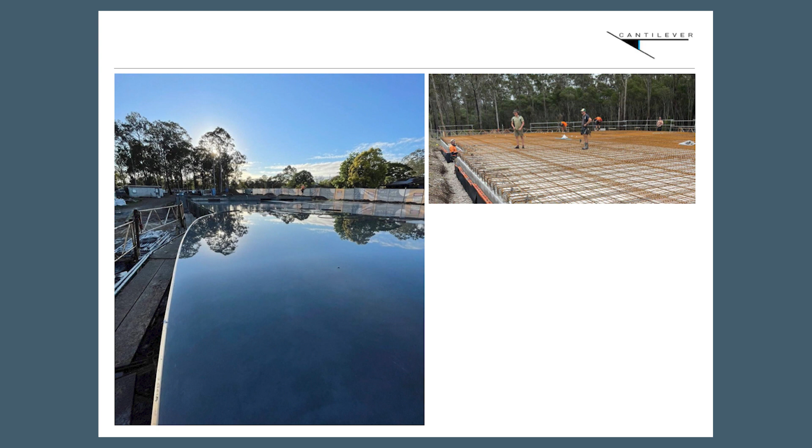Anyone know what this is? Water. So why would they do that? From going off so quick. Yep, it is - the best way to cure concrete is to pond it. Very rare to see. As a matter of fact, this is the first Australian building I've ever seen that's ponded. In hot climates, like in a few projects I did in Jamaica, it's all ponded because of the heat. You want to retain the water - you don't want it to evaporate too quickly, or it'll deteriorate the concrete.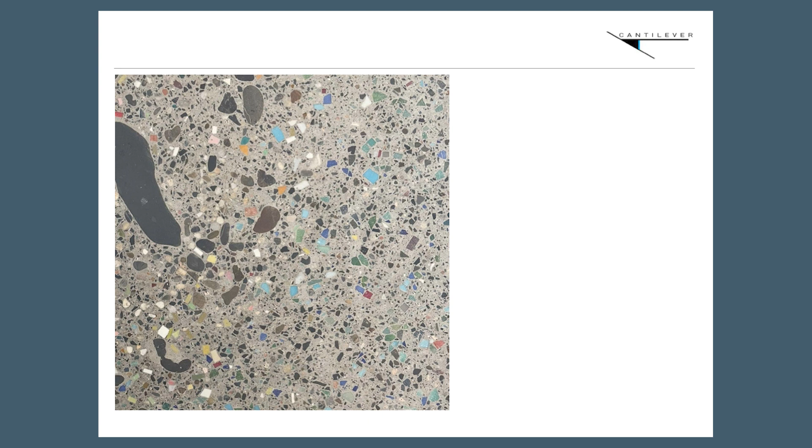Walter engaged a local glass artist to sprinkle glass into the floor, making a little river pattern through the center of the building. Here are the glulam beams, everything prefabricated.

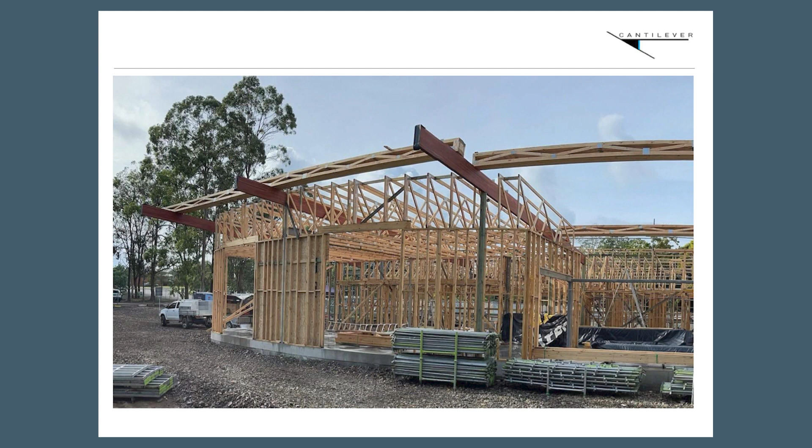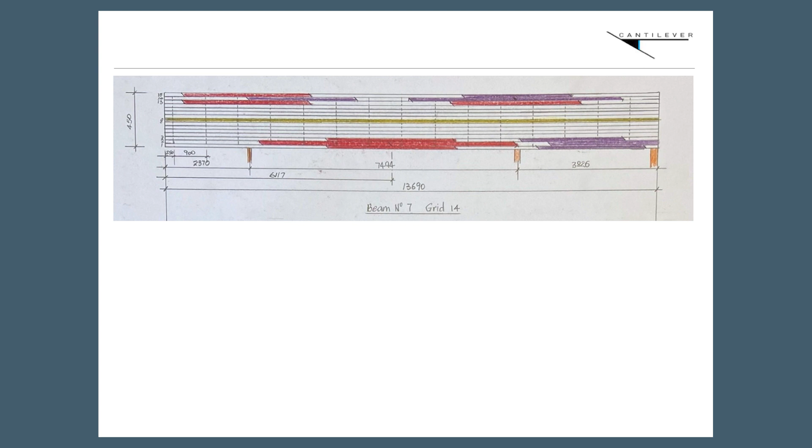Some more of the timber beams and the prefabricated walls. Here are the glulam beams, done by Curvewood. There's a guy named Ron, must be 100 years old. I rang him and said, Ron, I got your shop drawings for the glulam.

They're the most amazing things I've ever seen. And he goes, what? I've been doing this for 45 years and no one's ever rung me to tell me they're amazing. So I've asked him to donate them to the center, and they're going to frame them and put them up. These are hand drawn - the red are the timbers that are working hard, and he went and selected the ones in red, and the purple ones are working whatever.

So there's 6 of them that hold up, that were cut down from the site and hold up the roof. Never done it before. You know, if you want, this is emergent architecture, right? There's no one, and this was done on site. No one could ever have predicted that this is about to happen, right?

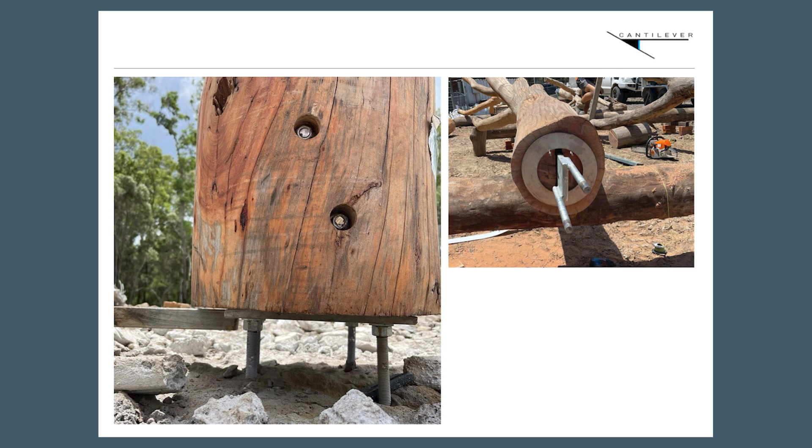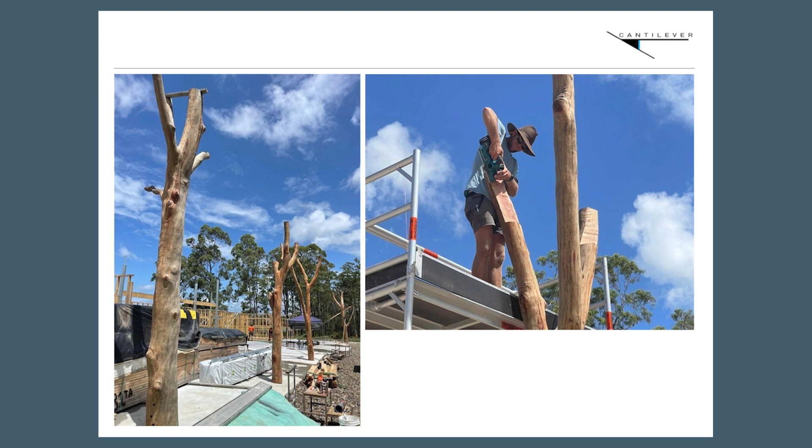One of the key parts of this was the fact that the orientation of the tree was a critical part to how this building worked. And we needed the base to rotate so that we could line it up with the glulam beams, because obviously these are organic things. So we developed this connection, base plate connection that has that. So there's Sam carving away at that to put the glulam in. The end.

What do you think? Do you know that I've been a structural engineer for a while now, right? And I've gone through waves of hating it and loving it, hating it and loving it. And it's now that I love it. I love everything about it. Yep, it's such, if you can get it right, if you can get those partnerships right, if you can get the team right, it is an amazing place to be, amazing. So don't let anyone tell you it's a shit place to be, because it doesn't have to be, right?

Especially when you live in the contract world. We don't live in contract worlds. We don't live in adversarial worlds. If you go to adversarial tenders, you're not going to get a good outcome. Everyone knows that. And some people are okay with that, right? Some people know how to deal with that, right? But I don't think it's the right way to do it.

It's interesting that... I was, sorry. So the industry advisory panel meeting we just recently had, with industry people, builders and architects coming, that was the outcome of the meeting, that decision. Yeah. Adversarial contracts, like that was what you were saying.

Yeah, absolutely. So there's thinking about contracts, there's an NEC 3 contract, which is in the UK, which is an integrated design contract. The US has an integrated design contract too, one that's not adversarial, where the number one thing is we will work together for a common goal, right? The reality is that we can all win here, right? I don't know what win means, but we can all win, right? And in an adversarial contract, there are winners and losers, clear winners and losers, right? But if we work together and we know how to do it, right, then everyone can win. There's no reason why, including the client, there's no reason why anyone has to lose.